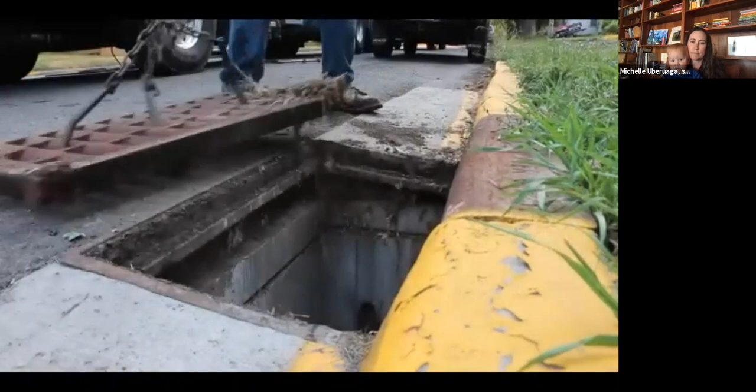The bad part is water running across hard surfaces picks up whatever has accumulated. All the pollutants that exist on the city surface, like oils and greases, fertilizers, dog waste, trash, sediment, all that stuff gets taken with the water. Where the accumulated pollution goes is crucial. The pipes inside our storm drains are separate from our sewer system. Stormwater does not go to a treatment plant. It flows directly to our local streams and ponds. At stake is the health of places Bozeman residents cherish, where we introduce kids to water, exercise our dogs, and renew ourselves in the presence of fish and wildlife. Places like Story Mill, not just enhanced by water, but defined by water, where you might see much more than deer, like trout spawning in the East Gallatin River, or a muskrat heading out on his evening rounds.

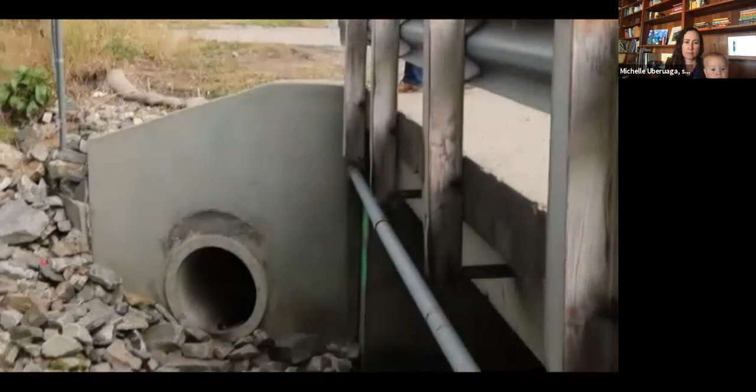With these hallmarks of Bozeman in mind, Kyle Mehrens of the city's Stormwater Division wishes we could all see what sometimes pours from outfalls like this one. A black sludge coming out of the pipe. And that black sludge is the result of sediment and trash, fertilizer, grass clippings. It's very shocking. It's something that everyone should see, because if you see it, it's going to dramatically change the way you manage your yard. Because once you establish this connection in your mind that what I'm doing in my yard or driveway or road in front of my house is going to end up here in this water resource, it's alarming and it's frankly disturbing. The city hopes each of us will think about stormwater like Bozeman resident Amber Zander is as she traces where oil-laced runoff is going. Or as Lauren Waterton is. On a shining day on Pete's Hill, she and other volunteers of the organization Run Dog Run are picking up what dog owners have missed in preceding months.

Waterton says the key is recognition. You know, that everything that we leave on the ground eventually ends up in our watershed, and whether it's our dog's poop or anything else, litter, trash, things like that, it all affects the water quality here and downstream. The city's dog stations do make an enormous difference.

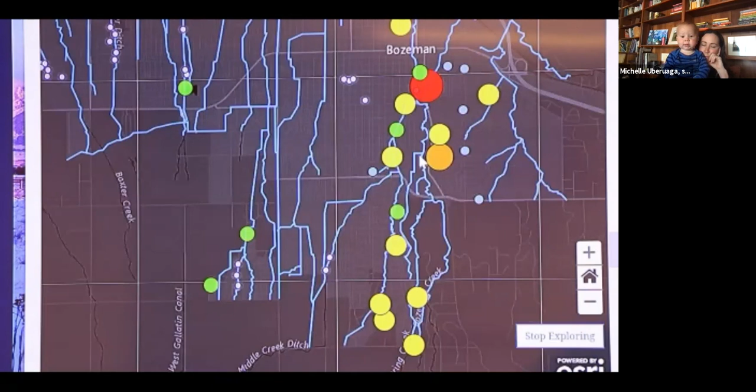Here's how much was scooped up and placed in the provided bins in 2016. So that's Pete's Hill. The red circles are roughly 6,000 pounds of dog waste. Orange, 3,000 pounds. You can see where the waste is being picked up. It's along Bozeman Creek. Bozeman Creek is beautiful, but it has an E. coli problem from dog waste. There are still too many dog owners not heeding the signs and doing their part. And we can solve this. Just pick up the poop.

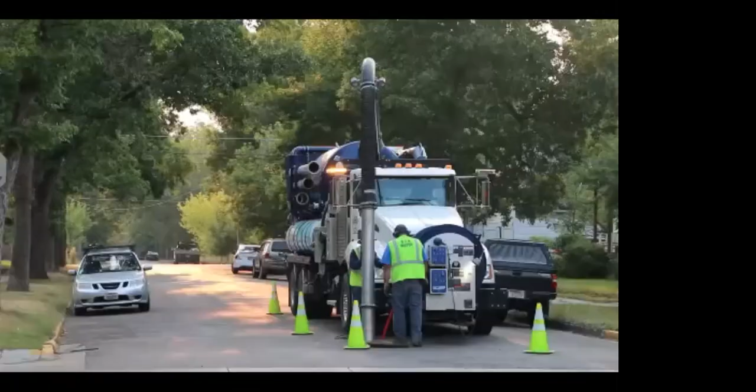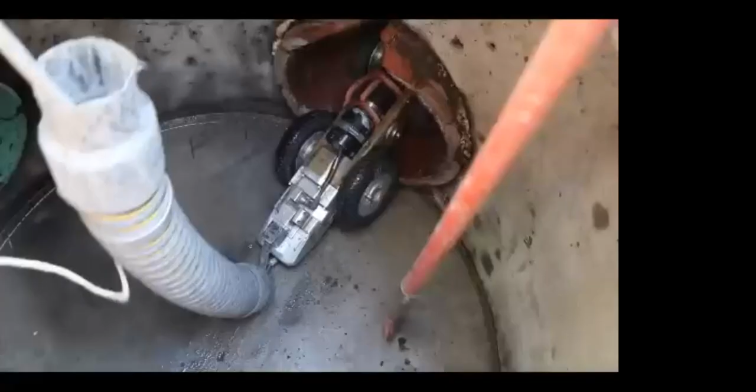City workers do many different things, often with fascinated audiences, to keep our underground system capable of moving water when it needs to. Here, with a giant vacuum, they're sucking out accumulated pollutants, stuff that got into the streets from our landscapes and driveways. Now they're easing a remote control camera into the manhole, guiding it into clay pipes that are up to 90 years old.

This is how they identify sections of pipe that are cracking so badly they could fail. You can get to something before it turns into a disaster. So the markings you see in your neighborhood are where they go in and replace, say, 20 feet of pipe to avoid water getting out and creating a sinkhole, which would be dangerous and require much greater expense.

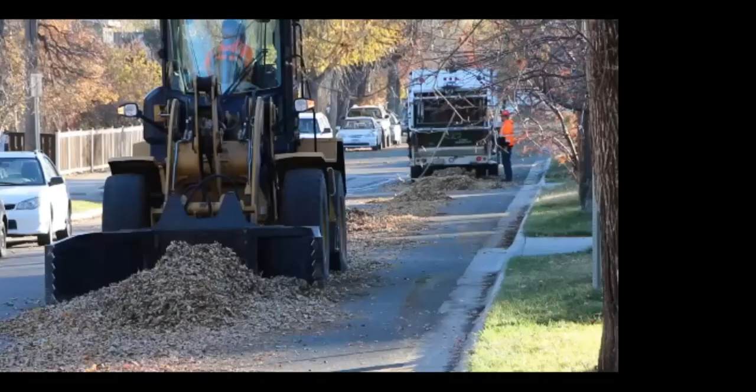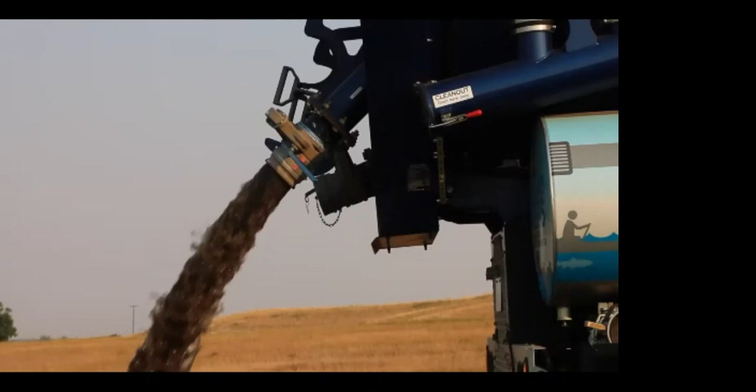Each fall, we see the massive leaf pickup operation when crews clear up to 1,000 tons of leaves. What most of us don't see is what gets vacuumed out of the system and disposed of in a better place. Crews aren't judgmental, but they hope residents realize it's impossible to intercept everything headed to the creek. So the health of our streams really depends on us.

Even your grass clippings that you mow and you blow into the curb line, the nitrogen in the grass gets in the creeks, and that's not good for the fish and stuff in the creeks. So just be aware of what you're putting in the curb, because it's going to end up in the creeks. Unless I can get to it first.

The city says small actions by each of us will make a big difference for our streams, like sweeping clippings and fertilizer off hard surfaces, fixing that leaky vehicle, and putting in landscapes that allow stormwater to soak in instead of racing to the nearest drain.

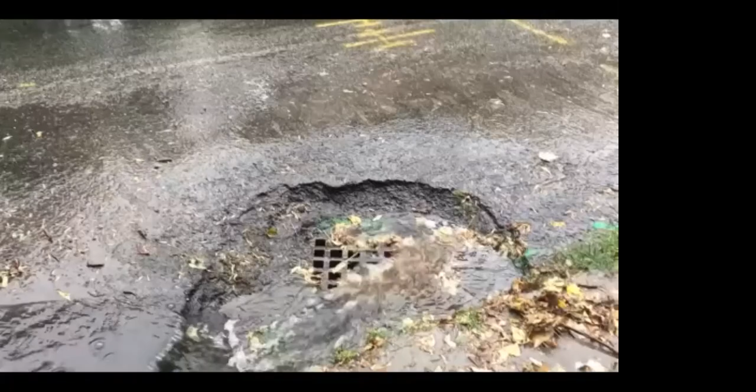Even hardscapes, thanks to the innovation of permeable pavers, can allow water to soak in. We can have the benefits of hard surfaces in our patios and driveways, alleyways and parking lots, while also reducing stormwater runoff.

What do trout eat? Bugs, that's right. At Sacagawea Middle School, students are envisioning how everything adds up. Bugs like to live on rocks, like small gravel. But if you cover all that small gravel with sediment, the bug habitat is gone, so the fish lose their food source. There's a lot of grassy areas, so there's probably fertilizer on them. This is all the storm drains in the East Main Street right here.

With parks laid out on the hallway floor and plastic beads and Tootsie Rolls to symbolize fertilizer and dog waste, they're simulating a rainstorm. Push that pollution down the river. This is not getting treated. The cumulative effects of that, shown really well in today's lesson by bringing the park pollutants altogether. It's things that when I was growing up in Wisconsin, we didn't talk about.

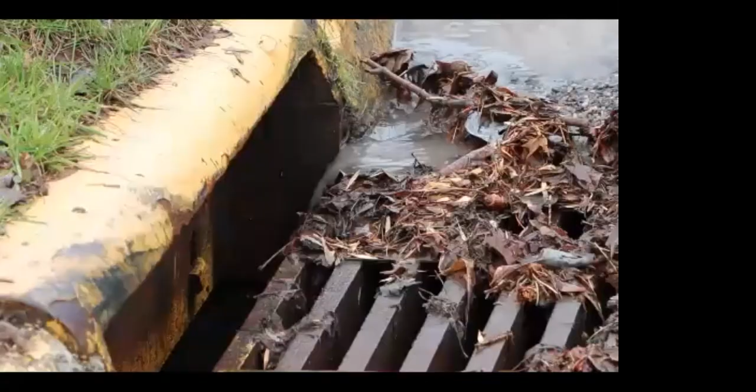It's hopeful, he says, thinking that one of these kids may be a future city engineer or mayor of Bozeman. In the meantime, the city asks that we all stay tuned because it plans to keep talking about how each of us can help reduce the impact stormwater is having on our local streams.

All right. Thank you, Jonathan, for putting that up. So that's our quick primer on the importance of stormwater. And then we have a real live city engineer here to talk more about what's happening in Livingston.

And we've been hosting these Zooms to talk about issues in our community as we're seeing more and more growth here in Southwest Montana, especially in Park County. It's a trend that's been happening for years and really has increased with the pandemic.

So the goal for us and for these conversations is to bring our community members together, talk about the issues, identify solutions, and how we can all have a shared language when we're advocating for this place in the future we want to see. And Shannon Holmes, who is our Public Works Director here in Livingston, is not only Public Works Director, but he also serves on the Livingston Planning Board. So for those of you that have been following along with that tremendous effort,

Shannon has been participating in night meetings for months probably now, back to back, often city commission meetings and then planning board meetings. He's been an incredible public servant and a wealth of knowledge about all the issues related to public works and a really strong voice for the Yellowstone River, which is something that we all deeply care about. Shannon's been in that job for 8 years, and we're really grateful for his service and really thrilled to have him here today to talk to us more about Livingston stormwater, what we've got now and what's coming as we grow. So I'll pass it over to you, Shannon. Thank you so much for being here.

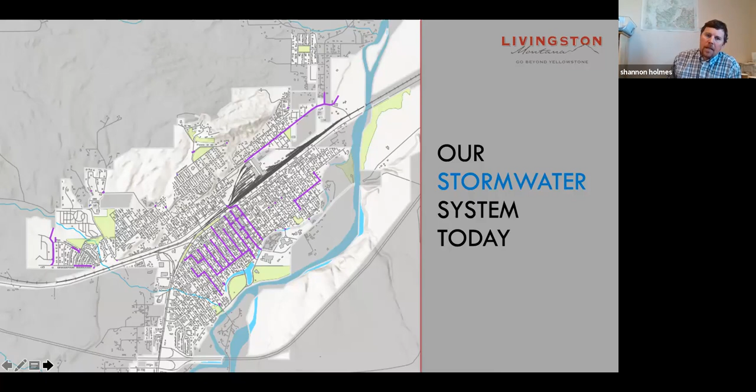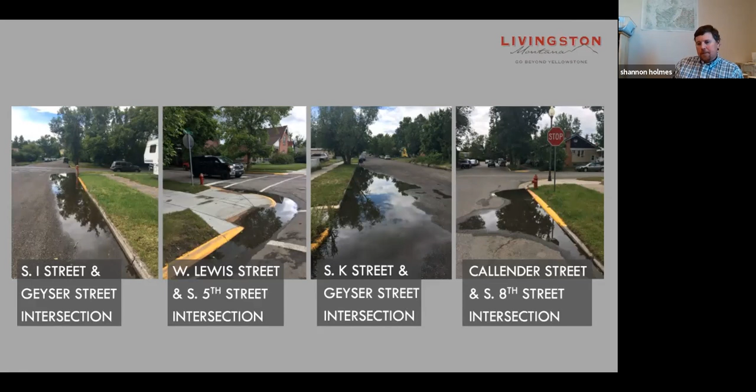As I said before, very, very obvious. The city, I think, has been very aggressive in fixing up our downtown. Not a lot of people know, but we've invested $6 million in infrastructure improvements in the downtown since 2017. We have replaced all the water and sewer mains in the downtown. We've replaced all of the stormwater system, and without a stormwater utility, basically the city's paid for all of the stormwater improvements in the downtown by a 50-50 split between sewer funds and street maintenance district funds.

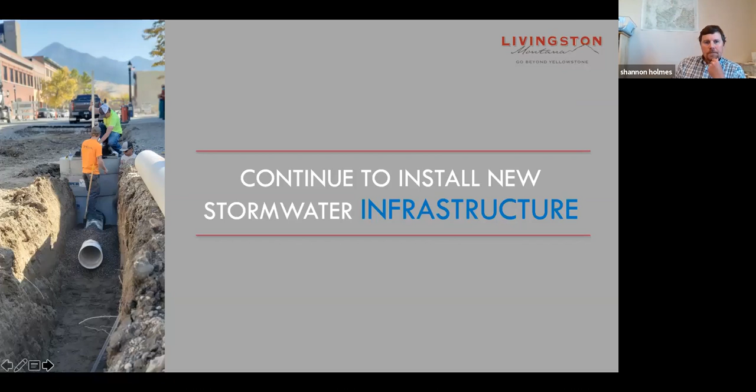But as you can see, with our streets being 38 feet wide, there's a lot of impervious surface there for stormwater to collect. The way that our streets are graded, that stormwater makes its way over into the curb and gutter, and then the curb and gutter is graded to ultimately channel that stormwater into an inlet if there's an established system nearby. So this is the type of scenario that we certainly want to see.

And if you want to take a drive around town, the Northtown development up on Scenic Trail and Sweetgrass Lane is a really good illustration of a stormwater system that we'd like to see for every development moving forward within the city. You have this situation, and then you have stormwater retention ponds where the water from the inlets collects and infiltrates into the ground. So next slide.

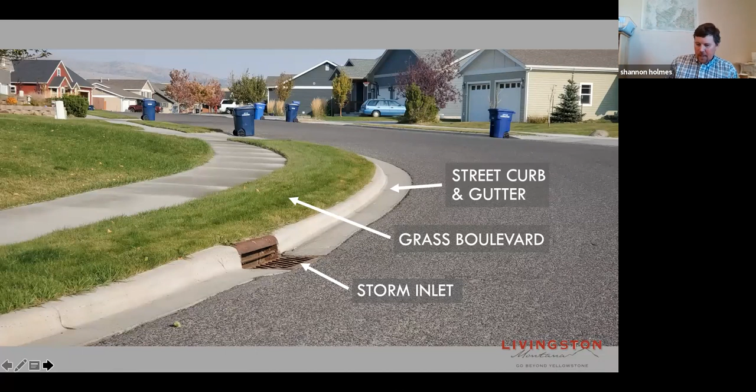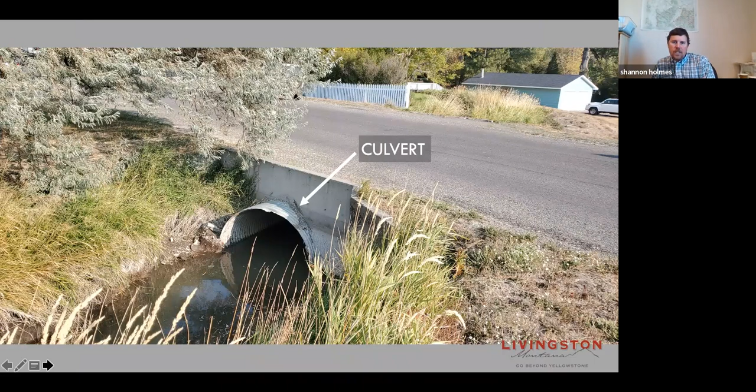This is pretty sure the Livingston ditch, and just another way that we can transfer stormwater in the ditch itself, and the way it travels underneath our city streets would be a standard culvert like this. Next slide.

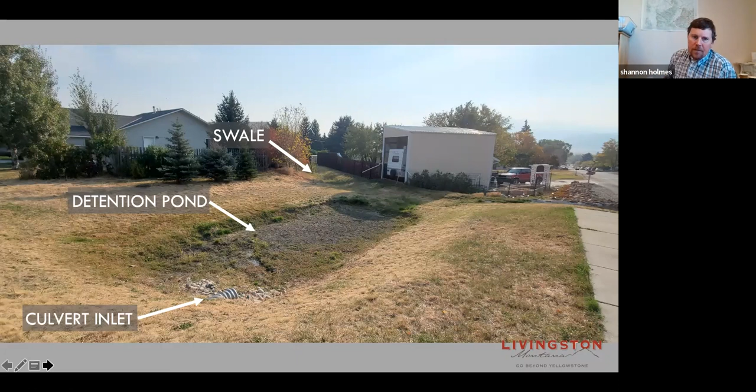All right. So back on the residential setup with the lawn, the sidewalk, boulevard, curb and gutter, inlet. Where you have stormwater inlets, you will always have piping underground. In the case of the Northtown development, all of those inlets collect and are piped into a retention or a detention pond. And this is the detention pond at the corner of 8th and Summit Street. Just another example of a stormwater improvement in Livingston. Next slide. All right, exciting.

Very proud to have been able to afford and install this feature. This is our one and only Stormceptor. It is located on Main Street, basically out in front of the Livingston Enterprise. And again, this is the only treatment structure for stormwater we have in Livingston right now. And I certainly would like to see several more of these installed at stormwater discharges near, say, Fleshman Creek, or even up near the lagoon area where we have stormwater collection networks in those locations.

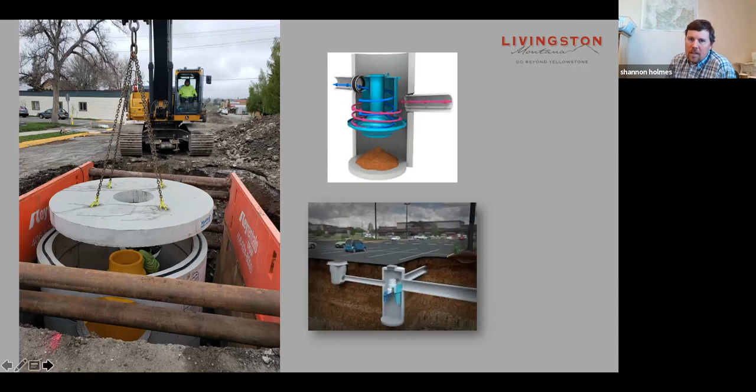And with the amount of stormwater we get and the snow maintenance in the wintertime with putting sand, salt sand, and ice slicer and things, we typically have to clean this at least twice a year, more often 3 times a year, since it was installed in 2018. So there is certainly a maintenance component to having structures like this, but it's definitely well worth the investment. Next slide.

So this touches home a little bit on our growth policy. Right now, I think we're sitting around 8,000. According to the 2020 census estimate, we're around 8,100. In the growth policy, I think there's been a general agreement that we're looking at a 2% growth rate. So we're not that far off from being required under the MS4 category for DEQ.

And for that in itself, I think it's good for our community to be talking about stormwater, and I'm hoping within the next year or so the commission can weigh in on looking at creating a stormwater utility so we can create some revenue to manage and operate a stormwater system. Next slide.

I don't really need to get into a lot of detail on these next ones. Again, this was towards the commission, and I want to make sure there's ample time to answer any questions. But I think our recommendation as far as creating a utility and what that rate would look like, it would be really great if we had $300,000 to work with, and that $300,000 would initially be used in 3 categories: obviously routine maintenance of our existing system and operating costs, and then certainly setting aside some of that money for capital projects, new improvements.

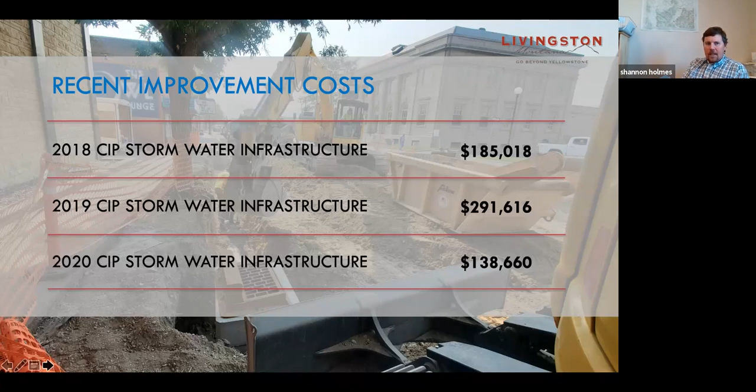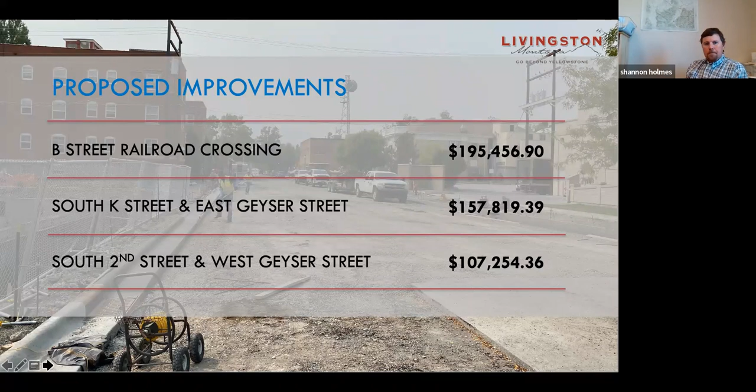Again, when we presented this to the commission, we proposed a 5-step process. Next slide. And I will let everybody know what that 5-step process is here. What we would like to do is create an inventory of our existing system, which in essence we've done, and continue our capital improvement projects. Our downtown improvement project began in 2018. We added stormwater utilities, upgraded curb and gutter, water sewer, new streets, sidewalks.

So again, I did mention the stormwater drainage report we had TD&H do in 2018. We certainly want to present that to the commission and have that accepted as one of our planning documents. Identify and rate priority projects within the existing system in order of repair priority. Develop a preliminary stormwater management plan and enforcement plan. And we'd love to pursue an agreement with the Livingston ditch to be able to utilize the ditch as a stormwater collection tool.